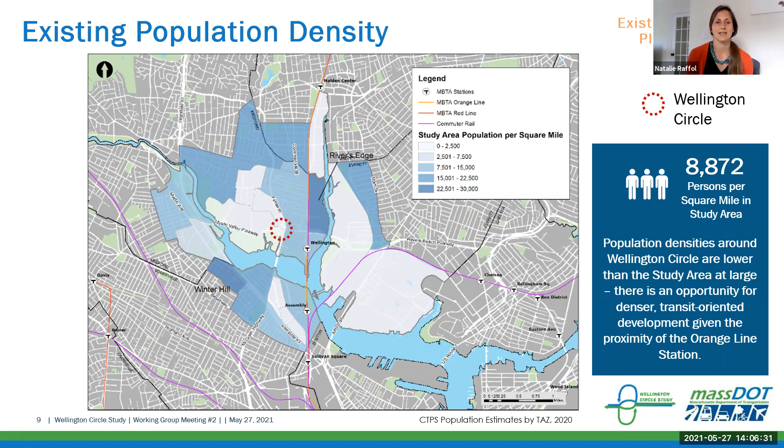And those are the geography units we use to look at the demographic data. You can see population density varies within the study area, with lower densities in lighter blue and higher densities in darker blue. Within Wellington Circle itself, it's relatively low density, which shows there's opportunity to identify areas for more transit-oriented development, especially given its proximity to the Orange Line station, as a way multimodal transportation options in the study area could be expanded.

We also looked at who makes up the local study area, since it's important to consider who we're planning for. We looked at several indicators: in terms of race, 36% of residents identify as non-white; in terms of language, 42% use a language other than English as their primary language; in terms of income, 12% of the population has an income below the poverty level; and 14% of households are car-free, meaning they do not own a personal vehicle.

Overall, the study area is pretty diverse, so it's important to consider how we can use transportation improvements to mitigate the impacts of vehicular congestion, things like air quality and emissions.

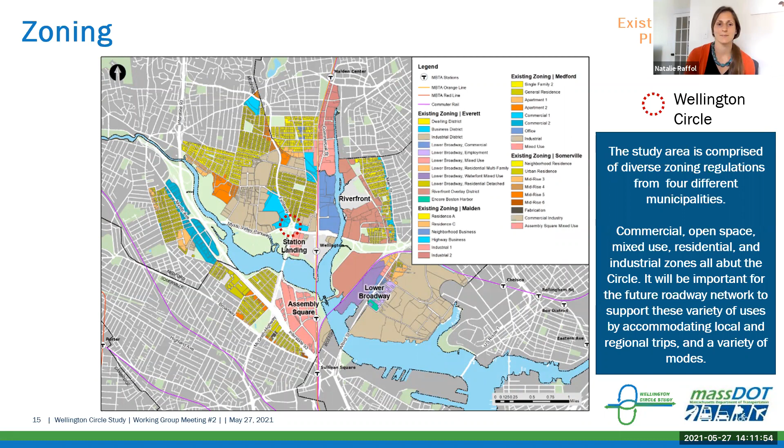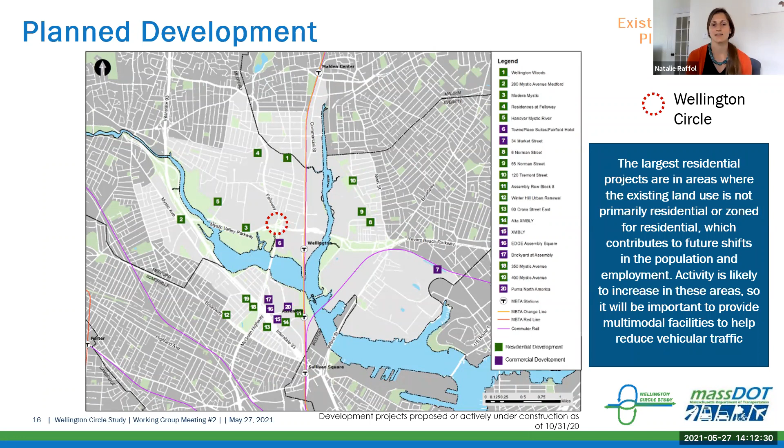So if we go to the next slide, we're just going to pause here for a few minutes if there are any clarifying questions. There'll be time later in the presentation for more discussion. This is just really focused on clarifying what was just presented.

Not sure if anything has come in the chat that we would address right now. Let's see. Well, I don't see any working group members with raised hands, so we'll continue.

We can go to the next slide.

So now I'm going to give an overview of the multimodal transportation network. Next slide.

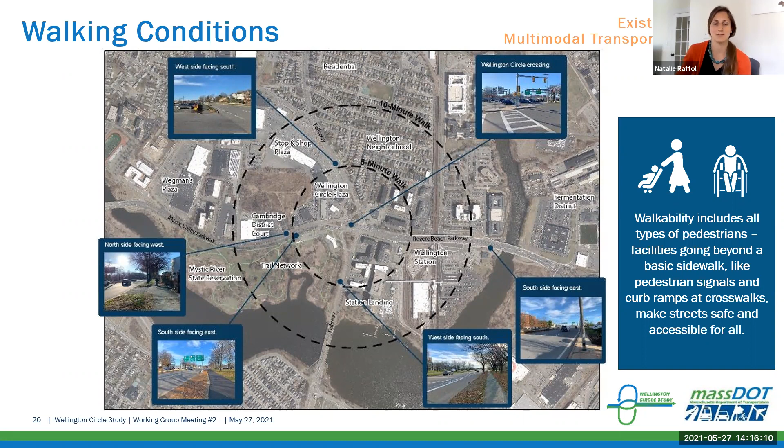And then on the north side of the Mystic Valley Parkway to the west of the circle, you can see in this photo that there are some poor pavement conditions. Things like cracking and uneven pavement also present safety issues and can just be uncomfortable for pedestrians. So we really need to think about walkability comprehensively and how it can be encouraged to make everyone feel safe and comfortable. Next slide.

Even though there are pedestrian signals, curb ramps, and crosswalks, pedestrians still need a lot of patience, attention, and stamina to make it all the way from one side to the other.

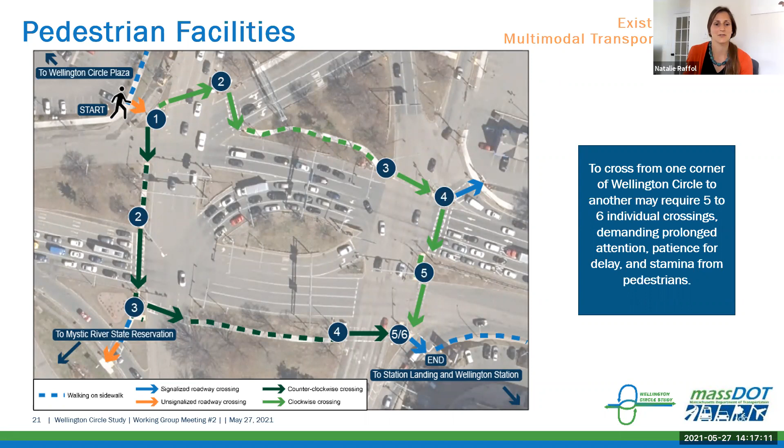If we go to the next slide, you'll see we did a comparison of what it would take to walk, comparing walking directly through the circle to these two designated routes.

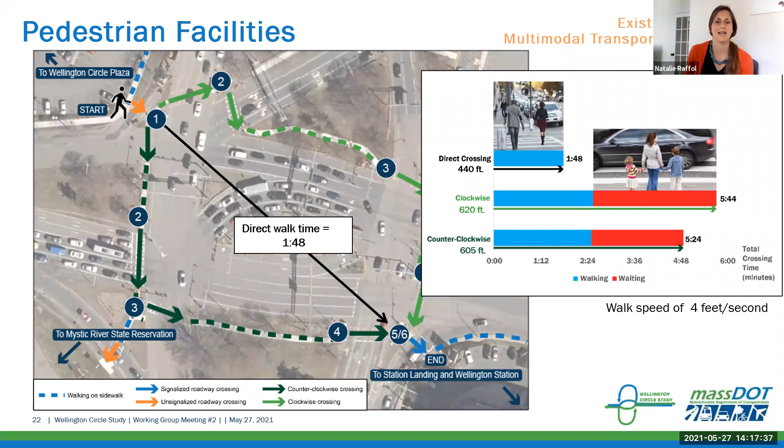Walking as the crow flies would take almost 2 minutes. This compares to the clockwise direction, shown in light green, which would be almost 6 minutes, and the counterclockwise direction, shown in dark green, which is roughly 5.5 minutes.

Knowing that pedestrians typically prefer the most direct and convenient path, having this circuitous crossing pattern, with all the time waiting at signals and walking longer distances, really does not promote a walkable environment. Next slide.

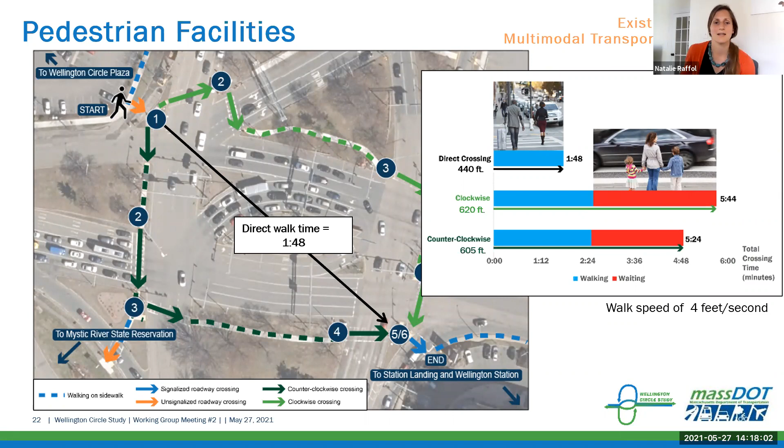It will be important to consider how the bicycle facilities are provided, so that they offer safety and comfort for people beyond those who feel comfortable riding adjacent to high-speed traffic and in multiple lanes of traffic, as that is what would be under the existing condition if just typical bike lanes were put in place. Next slide.

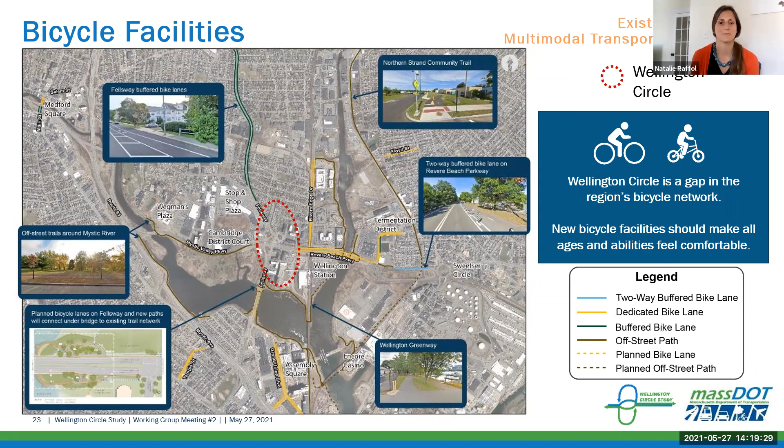What this tells us is that if more facilities, or better facilities, were put in place, it's very likely that they would be highly utilized because there is this high demand. Next slide.

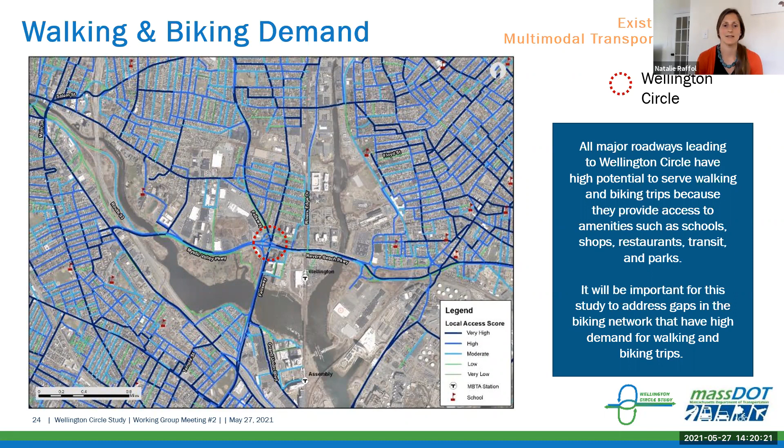We also looked at the state's pedestrian and bicycle plans, because it's important for this study to be consistent with established state planning goals and the vision of these plans to provide safe, comfortable, and convenient walking and biking facilities. The goals are to improve safety by eliminating fatalities and serious injuries, and to increase the percentage of trips taken by walking and biking.

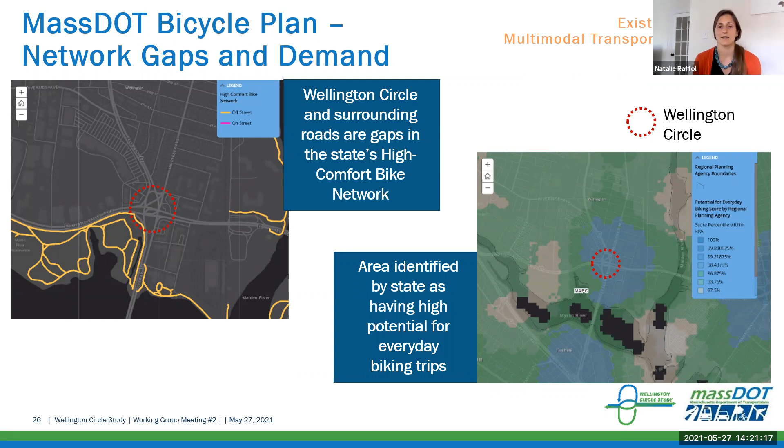With all of that said, we now want to hear from you a bit on what your priorities are for walking and biking connections in this area. Think about areas you would like to walk or bike but currently can't, due to lack of facilities, physical barriers, or feeling uncomfortable. Think beyond the existing condition today, and consider where your priorities really are for making these connections.

If you go to the next slide, we have a map that summarizes some of the existing pedestrian conditions, with different areas labeled with numbers. When we launch the poll, we'll ask you to look at the numbers and tell us the top 2 areas you would like to walk between most frequently.

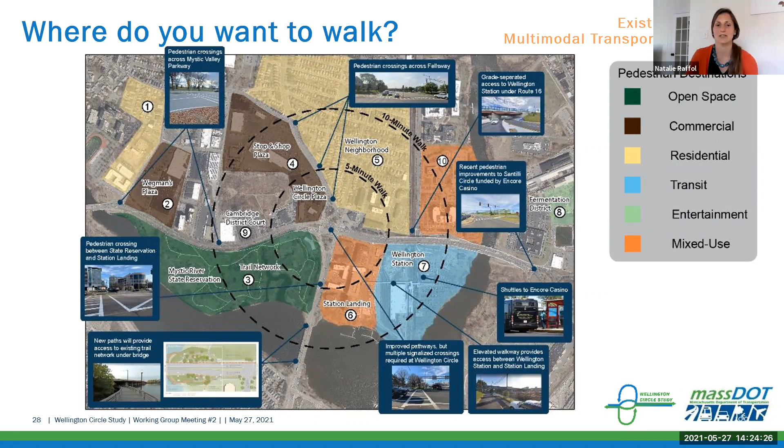And if we go to the next slide, this is a similar map, but focused on biking. And so again, we'll ask you to select the top 2 areas that you would most frequently like to bike between.

If everyone's finishing up, we can release the results.

So it looks like there's a lot of interest in Assembly Square as a biking destination. Then also north of Wellington Circle, number 2, and then Wellington Station again. So, it looks like multimodal connections to Wellington Station are rising to the top in terms of improving walking and biking conditions there.

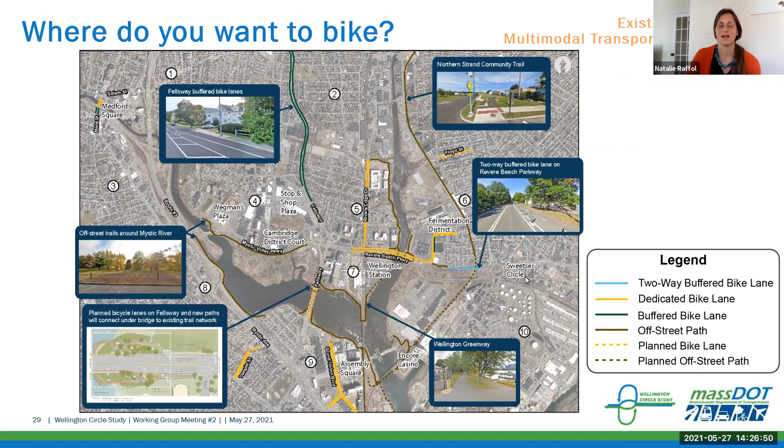So now I'm going to hand it off to Gary to continue on to talk about bus service in the local study area. Good afternoon, it's Gary McNaughton with McMahon Associates. With Natalie talking about the pedestrian and bicycle modes, I'm going to now spend a little bit of time talking about vehicle modes, starting with the bus service.

So we've got IBI Group on board, looking at the bus service and the bus experience within the area, and looking at some of the metrics that are often used for assessing bus operation, a little bit different than typical vehicle operations. What you see on the right are really the 3 primary metrics that we're looking at: the travel time, quality of service, and again, that's on an A through F grading system.

It's really, how long is it taking me to get through and to complete my trip via bus? The variability, quality of service, how consistent is it? Is it 15 minutes every day, or is it 15 minutes one day, 45 minutes the next? And then taking that travel time information, weighting it by the number of people on the bus to get that excess passenger time compared to a reasonable commute time. What is that excess time that's factored in? And using these 3 metrics to really evaluate how the bus service is working within our study area and around the station in particular. Next slide.

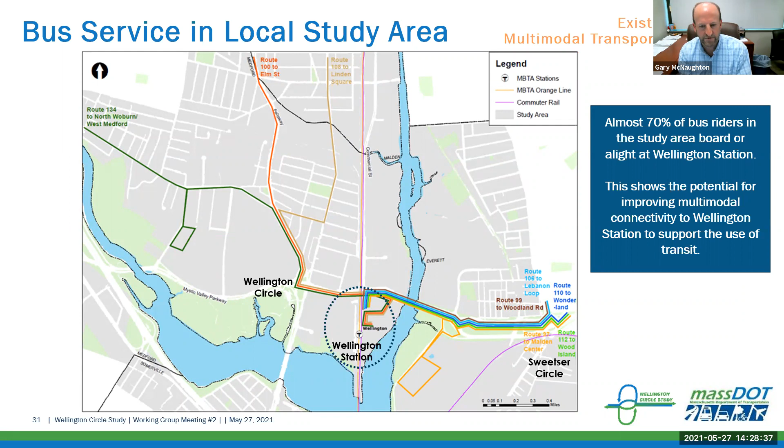So the routes coming into the station area and within our study area, you'll notice they all are serving Wellington Station. And correspondingly, 70% of the riders are boarding or alighting at Wellington Station. So that tells us within our project area, we have the opportunity and the potential to really enhance and improve the commutes for some of those bus riders coming through the area. Next slide.

So we've tried to depict some of the operations for bus access to and from the station graphically. I know this is a complicated slide, and all of this information will be available for you afterward. Some of it is geared for us to give you an overview of how to understand it, with the opportunity to look at it later and really digest it.

So the colors are talking about the travel time - where is the trip slower? And the line weight, whether it's a solid, dashed, or dotted line, correlates to how variable that trip is. A red dotted line is your worst case scenario; a green solid line means a really consistent, fairly quick trip.

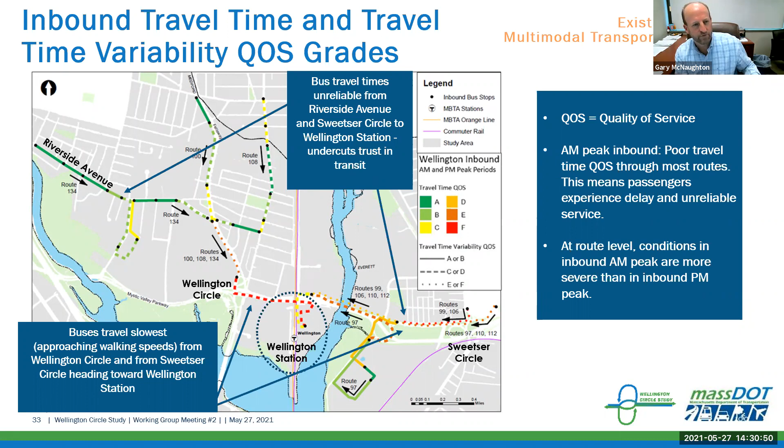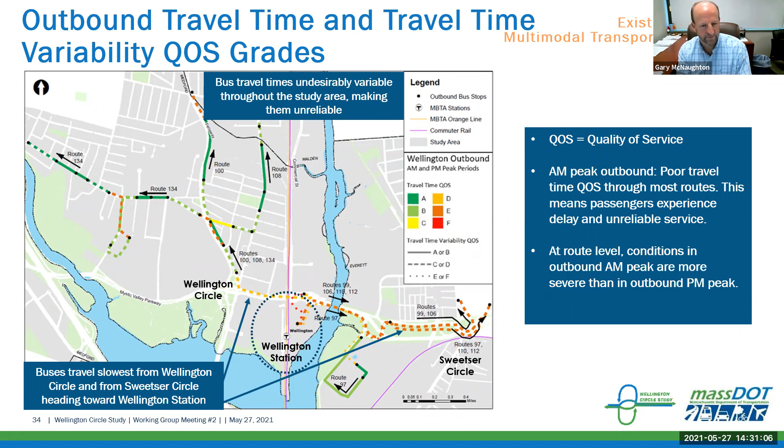When we look at the similar information for the outbound trips, you're seeing the same theme of delays between the circles - both delays and variability in those trips between the circles. They get a little bit better as you start to get outside of that area within the study area that we're looking at.

I know I ran through that kind of quick, and we had a couple of questions for you at this point, similar to what Natalie was doing. We want you to think not just about how you're doing it today, but if the facilities were there, what would be your preferred mode to get to Wellington Station? And then think about how it is today - how easy or comfortable is it for me to do it via that mode today?

Do you want to bring up the poll? So again, thinking: how would I like to travel if it was a comfortable trip, and then how would that experience be if I tried to do it today? It's a two-part question.

Eric, I can't see the number of respondents, so I'm going to have to rely on you to switch over at the appropriate time.

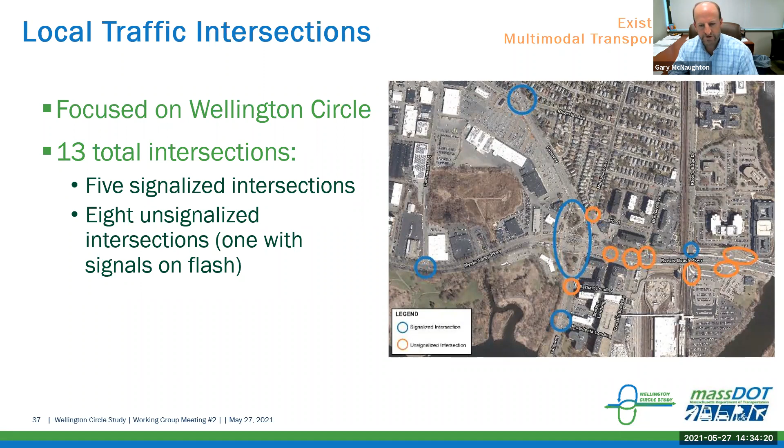All right, so then we still have the traditional approach - looking at the intersection, the overall operations, and the vehicle experience going through these locations. We've got a total of 13 intersections within the study area that we're looking at in close detail. Five of those are signalized intersections, shown in blue, and eight of them are unsignalized, shown in orange.

Doing studies under current circumstances has been a challenge over the past year plus. We were getting started on this project and the world changed rather abruptly, so we've had to make a concerted effort to identify appropriate traffic volumes for various projects and studies we've been doing, and this one was no different.

Fortunately, the Encore casino monitoring had occurred just prior to the impact of COVID, back in February of 2020. We also had some other data from the Route 1 viaduct construction. So we have a pretty good base set we've been able to build off, and we've adjusted those so that we have a balanced set that's consistent between intersections, using that to reflect the typical pre-pandemic experience.

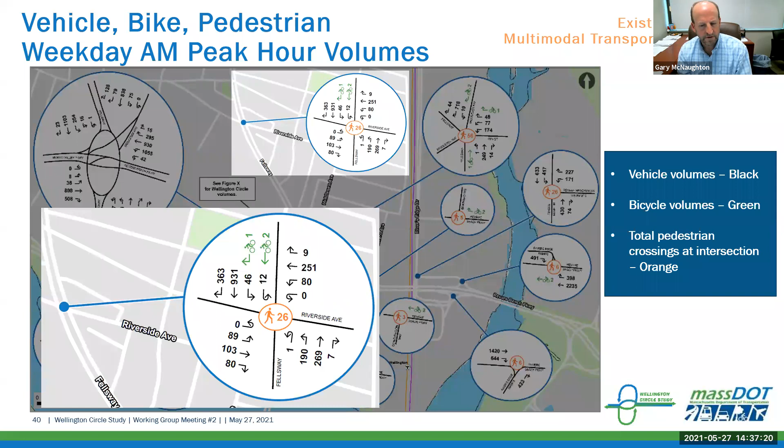For the PM peak hour, we have the same corresponding information. Don't expect you to digest it quickly on screen here, but you can go back and look at that information on your own later.

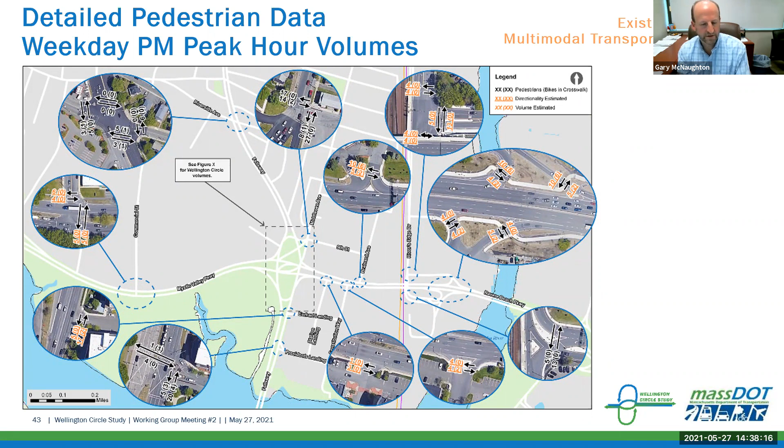When we try to step back - the circle, when you looked at those vehicle movement diagrams, is pretty confusing, particularly if you look at the circle itself. There are so many different connections that a vehicle coming just from the east trying to go south shows up at a few different stop lines through the intersection. So we've tried to boil it down to what are the movements that are happening, where are people going through the circle.

This graphic represents the weekday morning peak hour, and what can we draw from those patterns? In the morning peak hour, you're not seeing a significant number of left turns - those left turning volumes are pretty low, and all of these lines are weighted to the volume. The southbound movements are predominantly through, with some moving off to the east. The northbound movement is heavy, with almost 64% of it going off to the east. Similarly, traffic from the east shows almost half going to the south - that's a recurring pattern with the south and east connection happening through the study area. You're also seeing the heaviest movement entering the intersection is that westbound move in the morning peak hour.

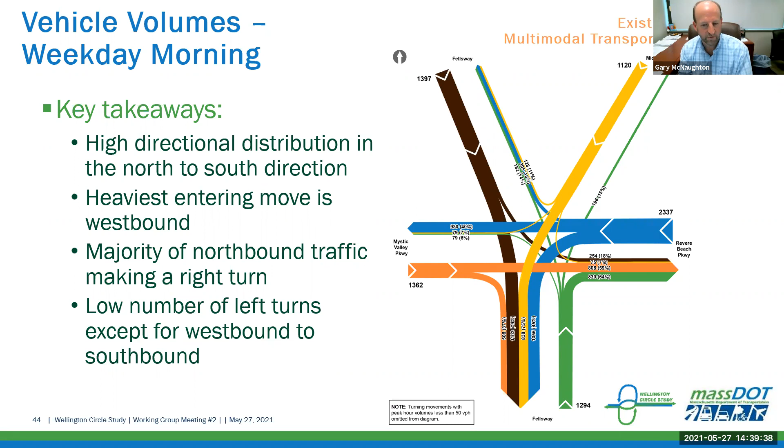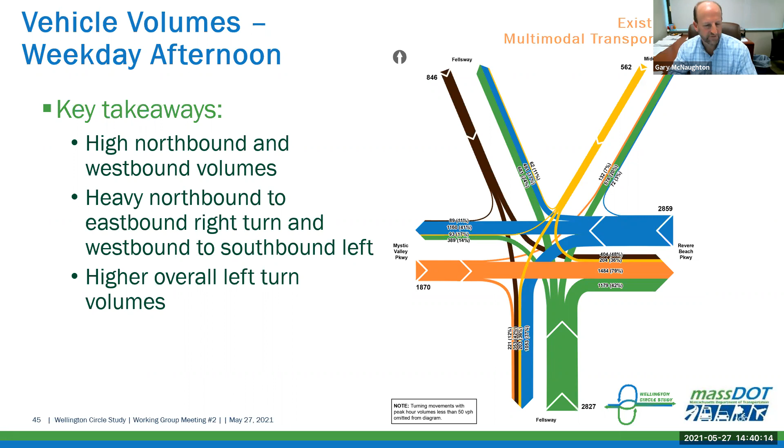When we look at the PM, you see some of the same patterns, but you're seeing a much greater dispersion of volumes. Those left turn volumes have all started to go up a fair amount, so you have a bit more diversity in the number of movements happening here. Your northbound still has a heavy right turn volume, but there is a little more dispersion into the other directions.

When we look at them side by side, you don't see some of the typical commuter patterns that you would expect. That east-west movement, westbound is always higher than eastbound. Normally you'd see that reverse from morning to afternoon peak hour, and we're just not seeing that. You're seeing consistently heavier westbound volumes.

When you look at the roadways overall within the study area, that section to the east of the circle, where I talked about on the bus information, between the circles being the most congested area—you're seeing that in these graphics where that leg to the east of the circle has the heaviest volumes.

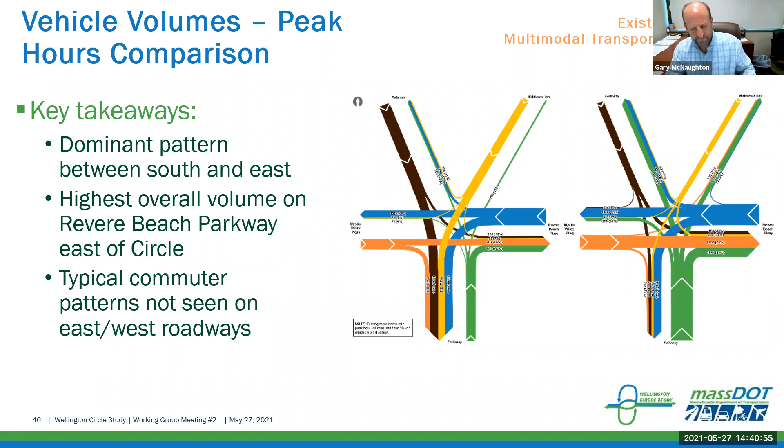The other factor we're looking at is safety and crash history throughout the study area. These diagrams try to give a graphical representation of what can be very technical and detailed information. The size of the circles is generally proportional to the number of crashes, not directly, but the bigger the circle, the greater the number of crashes. The individual colors match up to the type of crash.

I'll draw some broad conclusions. We have a similar graphic of the intersections that comprise Wellington Circle itself. You're not seeing a large number of bicycle crashes at any of the study area intersections, really due to the low number of bicycles. But you are seeing a significant number of crashes overall, 278 over a 3-year period, close to 100 per year. Again, not typical patterns of what we'd expect at a signalized intersection.

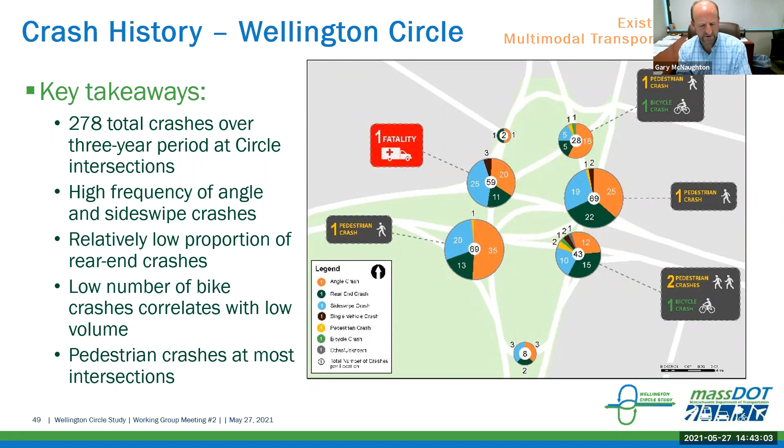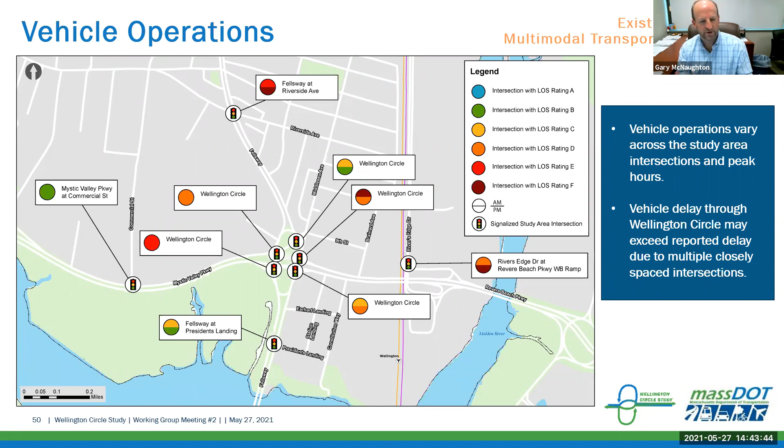When we start to look at the analysis results, this represents your traditional level of service. I may have talked earlier about how we're not just going to rely on level of service, but we are going to report it and run analysis that measures levels of service. What you'll notice is some locations show up as green and yellow, levels of service B and C, that don't correlate to your experience going through those intersections. Even some of the Ds you're seeing, those intersections don't operate as level of service D because of the interaction—these intersections are closely spaced, they're going to be interacting with each other, and queuing is going to interact from one intersection to the next.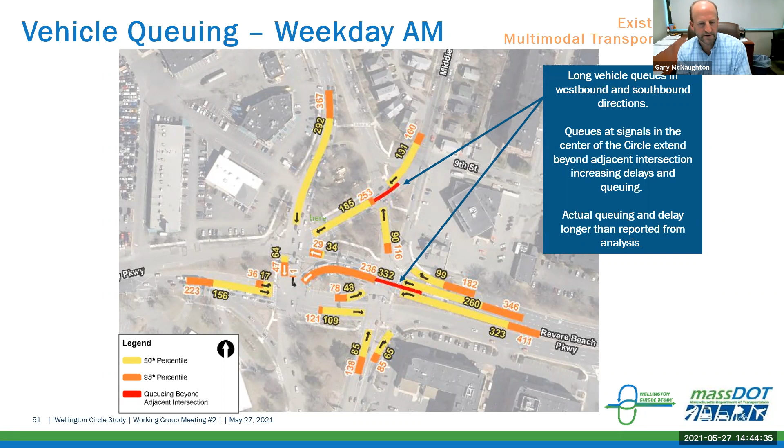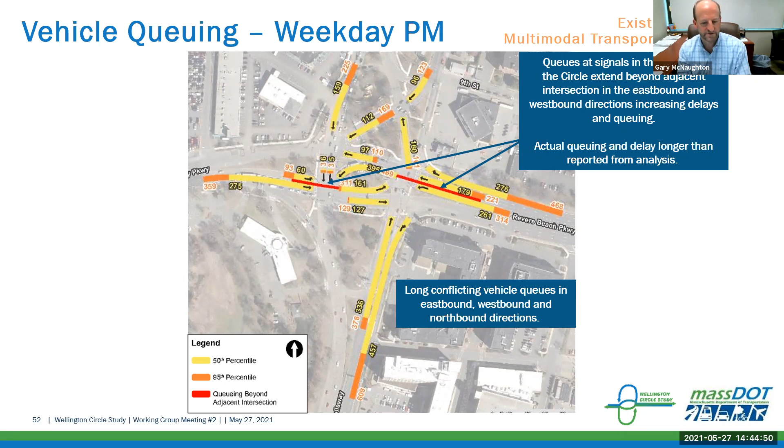In the afternoon peak hour, overall queues have gotten a little longer. You're still seeing queues extending beyond the available storage, starting to spill into adjacent intersections, creating those gridlock situations, but in different locations than you're seeing in the morning peak hour.

The other thing we want to know is not just how many cars are going through here, but where are they going, where are they coming from, where are they going to?

Fortunately, we have the availability of new data sources over recent years. This location-based service data is pulled from GPS systems and cell phone data. It's all anonymized, so we can't tell you exactly who went through the circle and the study area roadways, but we can certainly identify where they were generally coming from with a reasonable degree of accuracy. We don't get down to the street level, but we have a good understanding of where folks are going to and who's traveling through the area.

All of this data is from 2019, before the COVID impact, so we have a more traditional, typical data set. We looked at three specific locations within the study area to identify how folks are traveling: Wellington Circle, Wellington Station, and the Encore Casino.

When we look at the data and start to see who's traveling, how the trips going through the circle are happening and where they're coming from, most of them are local. It's 60% in the morning peak hour that are originating locally, defining local as the adjacent communities within the study area. Those local trips don't have a lot of flexibility to take a different route necessarily, but they may have more flexibility in terms of using other modes.

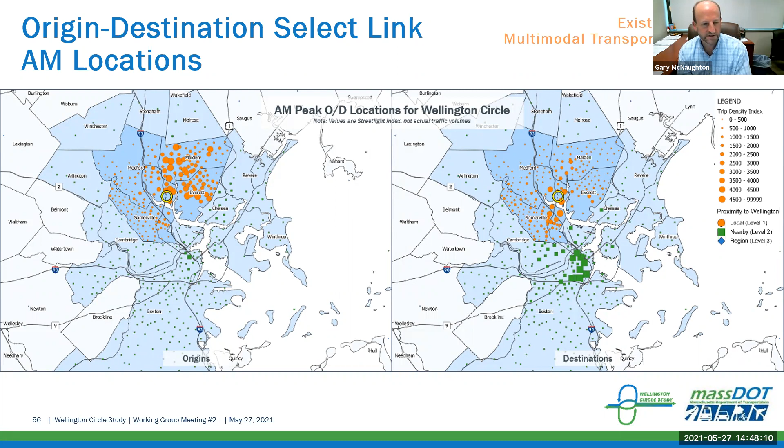Depicting it in a slightly different graphic format: looking at the morning peak hour southbound into the circle, a good chunk of them are to the north and east, the next big proportion to the north and west, and then where they're dispersing to, into Boston, Cambridge, and Somerville, seeing how those folks are traveling through the area. In the evening, the northbound trip, where they're coming from and going out to is primarily Medford, Malden, and Everett.

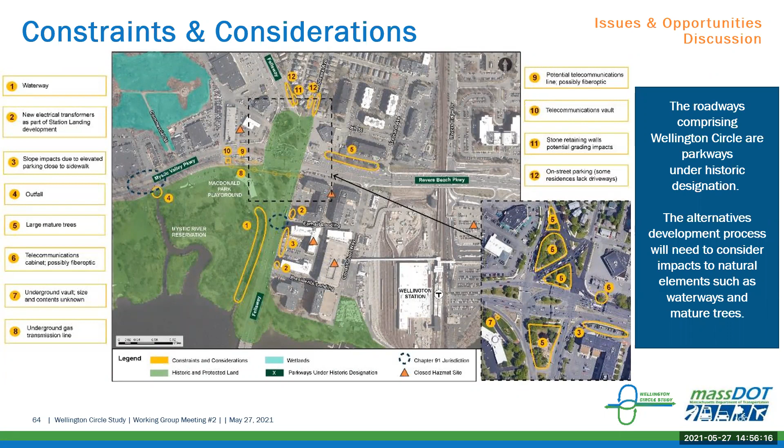As we move forward with the alternatives development process, we'll also analyze each alternative in terms of what potential impacts they may have to natural elements. This is all part of looking at the big picture and developing alternatives within the planning context of Wellington Circle itself.

But there are also opportunities present here. Those wide roadways that are barriers also provide opportunities for allocating some of that space to other uses for pedestrians, bicyclists, or transit. We'll keep that in mind as we go forward.

There are opportunities for connections. There are existing trails through the Mystic River Reservation, and we've heard that's a destination for a lot of people. We'll keep that in mind as we develop alternatives.

Beyond the physical roadway, there are also opportunities for land use improvements - mixed use, increasing population density, and the types of land uses that encourage walking, biking, and transit use. So we'll look at the bigger picture, not just the physical improvements to the roadway itself.

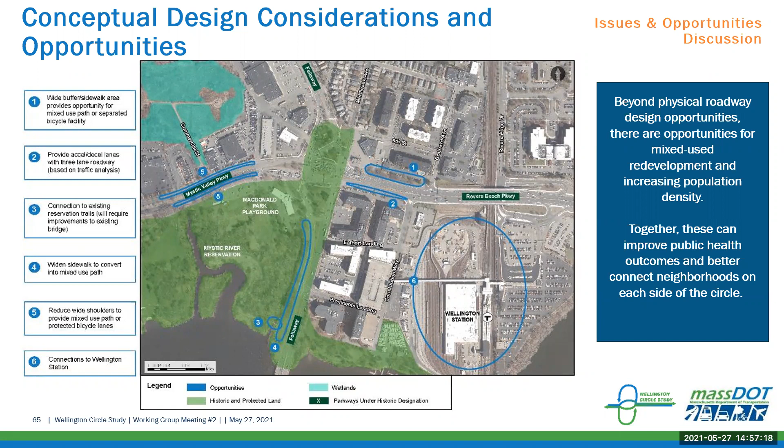This project, as many of you are aware, is part of a larger package of mitigation commitments by the Encore Casino. Some are already underway - Sullivan Square improvements for flow and pedestrians, and the same at Sweetser Circle. There's been a bike-ped bridge designed to the casino, as well as a variety of infrastructure and travel demand management services such as water transportation, shuttle buses, and Orange Line service improvements. So this project is being considered in the context of that larger package of improvements occurring as part of the casino mitigation.

As Michaela mentioned at the beginning, the goals and objectives really help inform the alternatives development, as well as our understanding of the key issues. As a refresher, we have mobility and access goals related to traffic congestion, facilities for bikes and pedestrians, and improving connectivity to Wellington Circle.

There are goals for safety in terms of reducing speeds, conflict points between modes, and providing dedicated space for pedestrians and bicyclists. For quality of life, we want to make this an attractive place, improve public health, minimize environmental impacts, and provide fair and equitable treatment for the environmental justice populations, of which there are a number in this area. And then connectivity - reducing travel delays, improving access and circulation, and promoting active transportation.